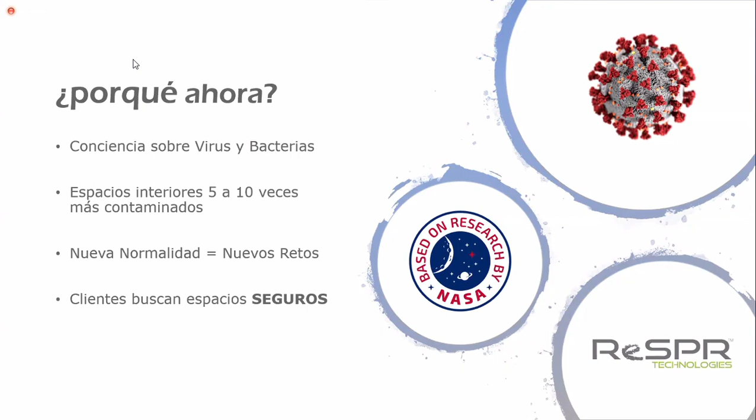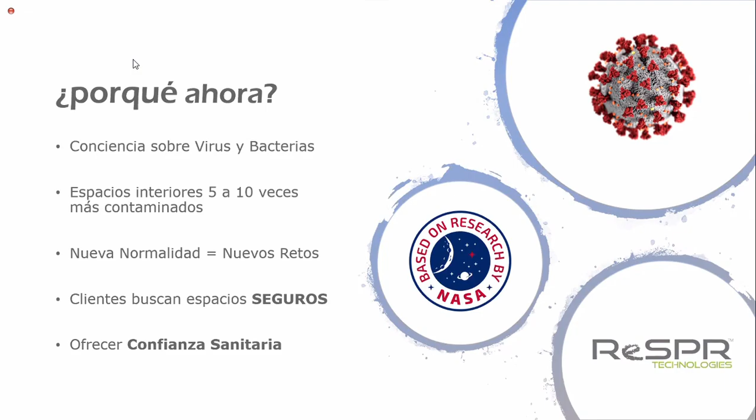So with this new normality, these new challenges, we need to have more safer spaces and provide sanitation certainty, in this case, to the airports and staff that work at the airports. We need to protect the passengers and collaborators at the company. This is also important. They're not free from pollution.

As I was saying, it's a technology from NASA. It's part of the space station. At a point in time, it was used to maintain plants to keep people longer in space without consuming too much oxygen for the astronauts. But we realized there were much greater benefits.

We're talking about active purification, where we will take this solution where the problem is. So far, technologies we're using to clean the air at any airport, any corporate areas are passive technologies. We call them passive because I need to take the problem, the solution to the problem, ultraviolet lights and others, and I try to clean up the air. But we send the solution towards where the problem is.

I will explain how it works. We do it constantly. We work 24/7, different from other technologies that I imagine many airports are using or were using before. In this way, we will eliminate 99.9% of viruses, bacteria, fungi, spores, or any organic matter, so much in the air and surface.

A bit talking about the technology: what do we do? We decompose a bit of the relative humidity in the environment, which is H2O, into peroxide, oxygenated water. Hydrogen peroxide, as we know, is one of the most unstable molecules that exist. If we buy oxygenated water in a pharmacy, it comes in a brown bottle, because if it's hit by sunlight, it becomes water immediately. So what we do is generate this hydrogen peroxide at such low levels that we can barely measure them. We know we generate less than 0.007 parts per million.

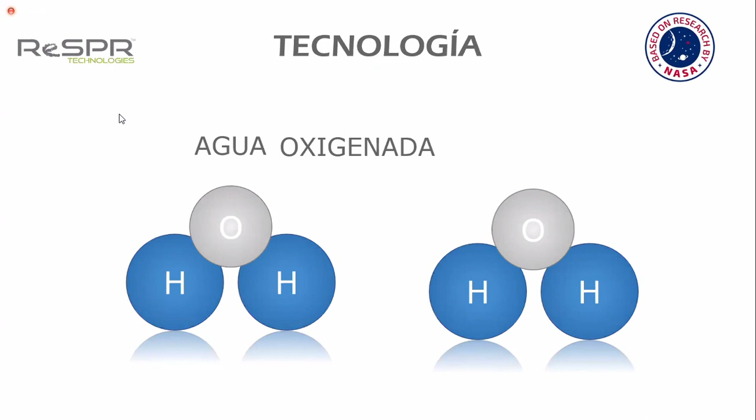We will find in the environment a series of hydrogens. There will be on all microorganisms, viruses, bacteria. With sending this peroxide, what we do is look for these hydrogens to turn this hydrogen peroxide once again into relative humidity. So it's 100% safe. It's the most natural way to decontaminate and the most powerful one we can have.

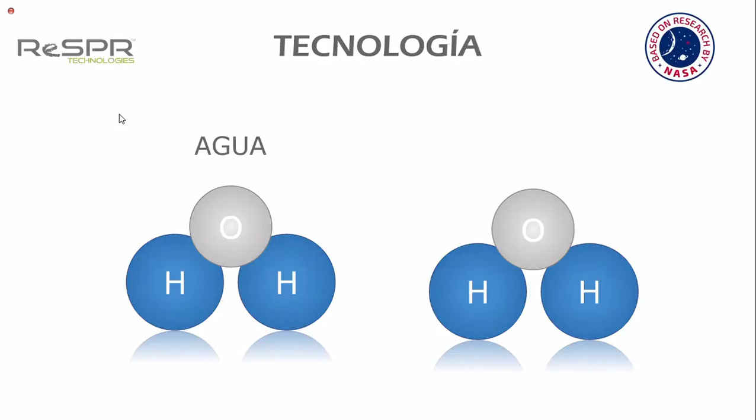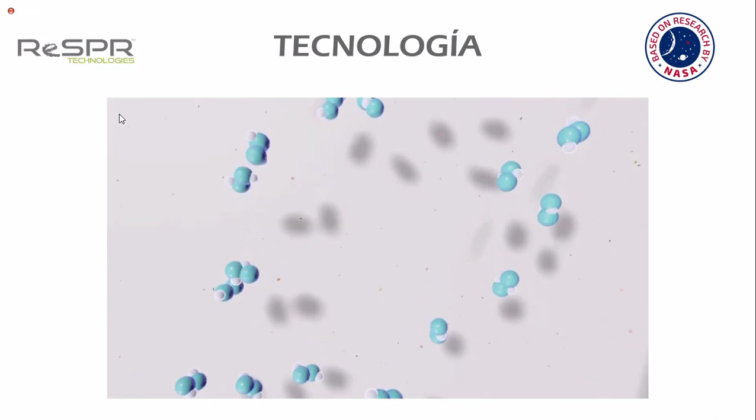When we send these particles - this is a bit exaggerated here so you can see how they stick - to microorganisms with bacteria, we break down these cells to extract this hydrogen, so we deactivate them. In the case of viruses, what we do is destroy their receptors, since they have their protein on the outside part. We deactivate them and they cannot contaminate. In the case of fungi, what we do is dry them out.

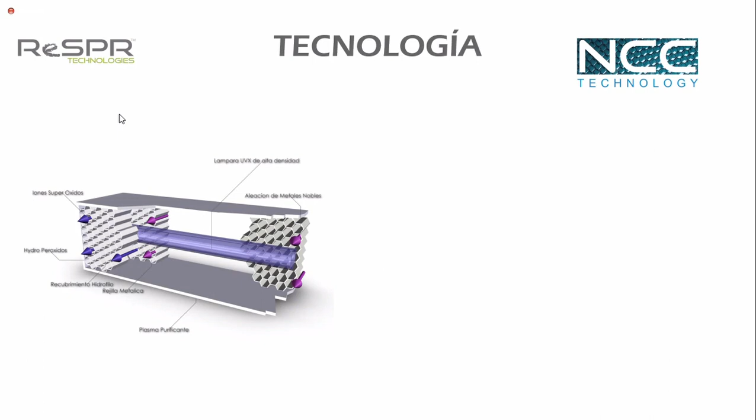How do we do it? Obviously, we use ultraviolet light, not as a purification method, but as a source of energy. Together with carbons and metals, we do this decomposition of the relative humidity into peroxide.

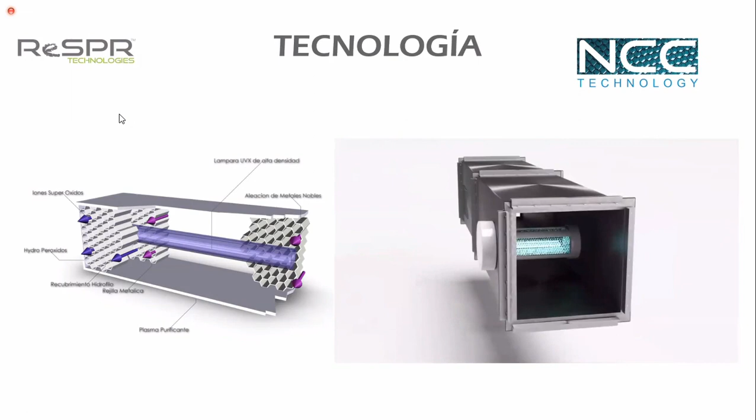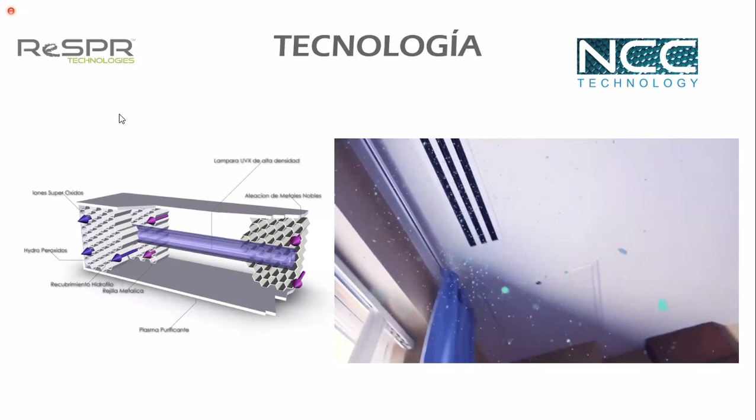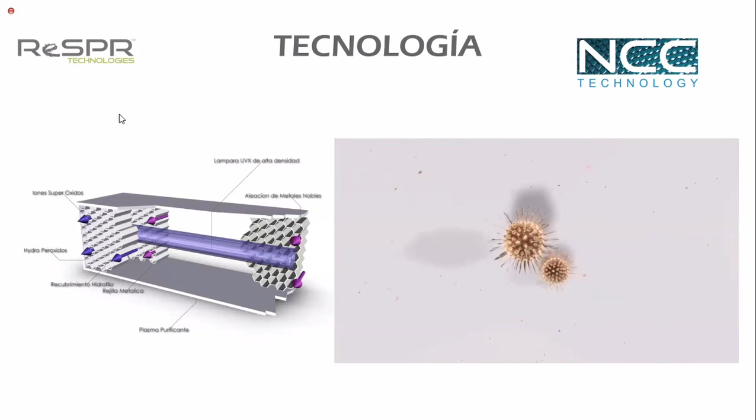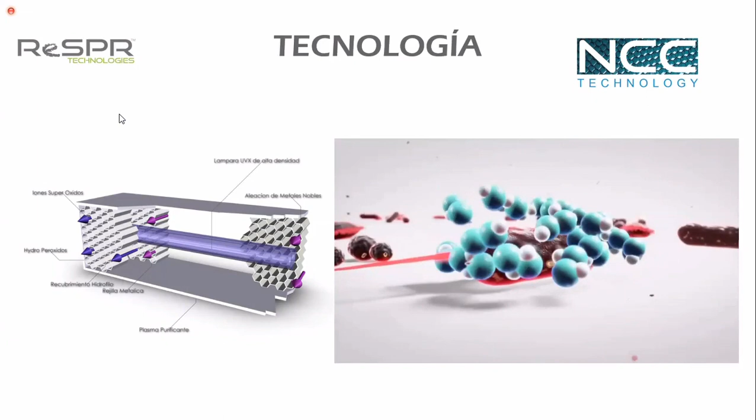There are several ways of doing it. One way is by introducing this in a duct, the same air conditioning ducts where the relative humidity comes in. We decompose it into peroxide and send it out as microparticles in the environment. As you see in these images, this is a hospital. These microparticles will be in all the air, looking for these microorganisms to decompose them and precipitate. We use ionization in our technology for precipitation of particles, and peroxide for decomposition or elimination of microorganisms.

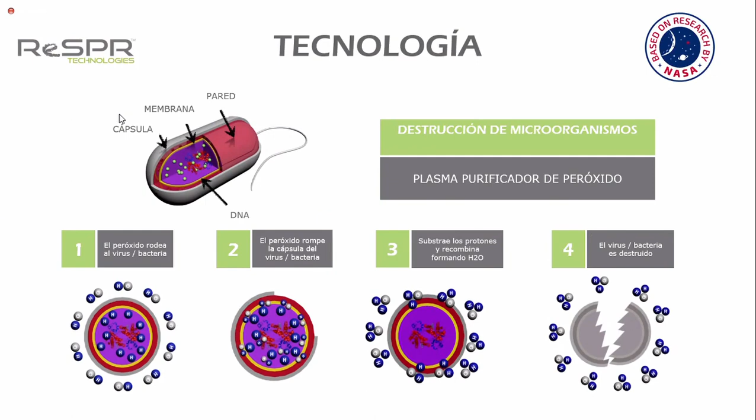This is an example of bacteria, for instance, how we break down this cell wall. We extract these hydrogens, we deactivate this bacteria, and H2O becomes relative humidity once again.

We have thousands of tests, many with Microchem. They support us with the amount of hydrogen peroxide we generate to provide support to the customers. We also have medical tests showing that no person will be harmed.

But what's most important, all our customers that want to do their own tests on site, it's normal. No matter if I send them 300, 400,000 tests - we've done many thousands of tests - we can share our tests with all of you. If you want to do it on your site, on your place, we can do it.

It's very quick. In approximately 2 hours, we eliminate 90% of the contaminants on the surface. And in 12 hours, we reach zero. So we will always keep it at zero, 24/7, in the air and on surfaces.

We have several types of microorganisms. We don't care which type of microorganism it is. We're not a medication. We know COVID is around the world now - just about no one is COVID-free in the world. So we know it's a behavior. We cannot ensure it, but we've done it with all types of viruses, N1, H1 - we know we eliminate them. We're not a medication. We kill microorganisms based on our reaction, a natural reaction based process.

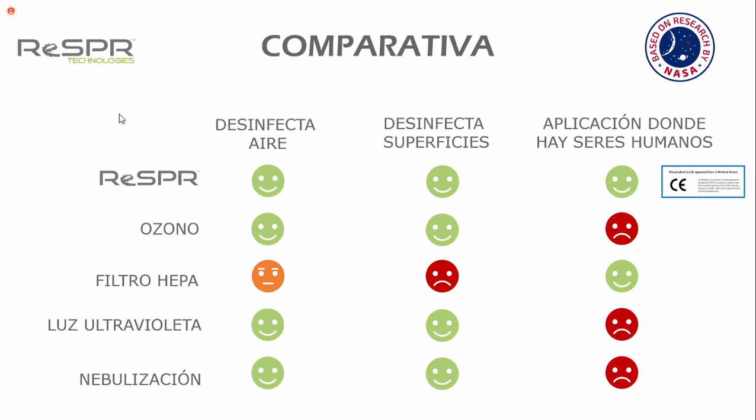The same with nebulization. It could be with chemicals or peroxide, but the levels of peroxide that are used are greater than those allowed by WHO. So we can't go inside the airplanes and have people like in Ghostbusters fumigating and doing all of this, but you can't do it with people inside the plane.

Now we go to the different types of equipment we have. So we can go to your questions. I imagine you have several.

We have equipment that goes directly and works with the ducts. We make a small hole. The head we see here is outside, and only the cartridge and catalyzers are inside the duct. We're not a filter. We don't affect, there's no drop in pressure in the duct. It's the same pressure. We will take advantage to send this peroxide to the different areas.

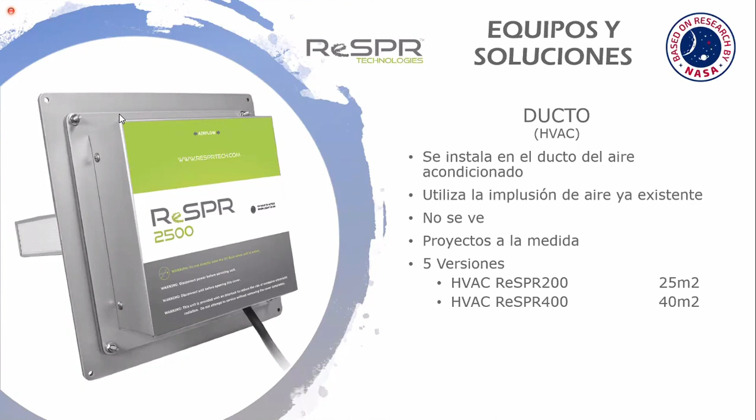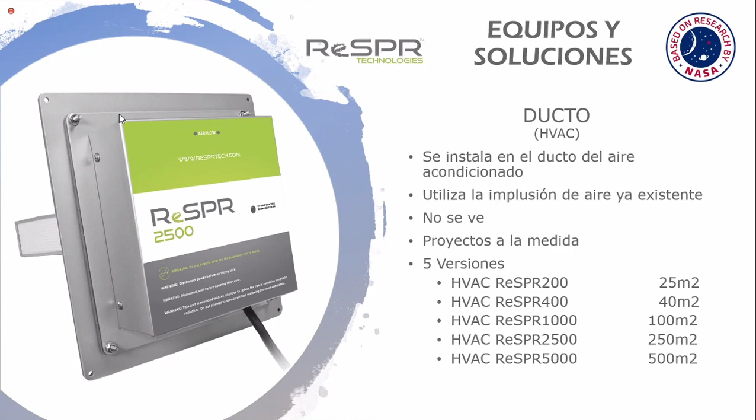Portable equipment. For me, this is the best one we're using, not necessarily the best one in the case of airports, but it has different applications. We can install it at airports, in an office, at a home, anywhere, in a restaurant. And we call it plug and play because you just plug it in, and there you see it says 3,000 square feet. Depending on the area, we will purify. We will apply it here, and then we can purify those areas.

We have 2 models. We have the 50 model for 50 square meters, and the 3,000 for 200 square meters. But depending on the load of people, we offer up to 278, 300 square meters.

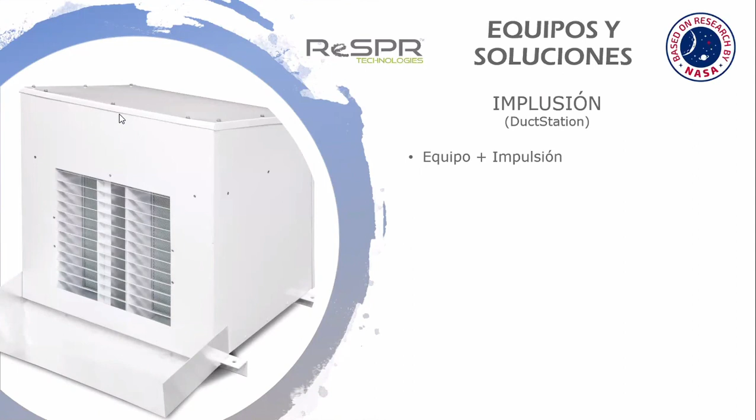In the same way, I installed this in the Mexico City airport once. This is impulsion equipment. The only thing we do, the same equipment we have for the ducts, we build a box to simulate a duct. And in this manner, it can work 24 hours a day, and we don't have to use the airport's ventilation.

So we have for 25, 40, 100, 500, up to 1,000 square meters. Depending on the areas, there must be open areas. The only thing that limits us, the technology, is the separation, the doors. If I have an office with 10 cubicles or an office of the same size open, if it's open, certainly I will have one single equipment for 250 square meters. But if I have 10 cubicles, I will need one equipment per cubicle, be it in the duct or with its own impulsion. So these are topics to consider.

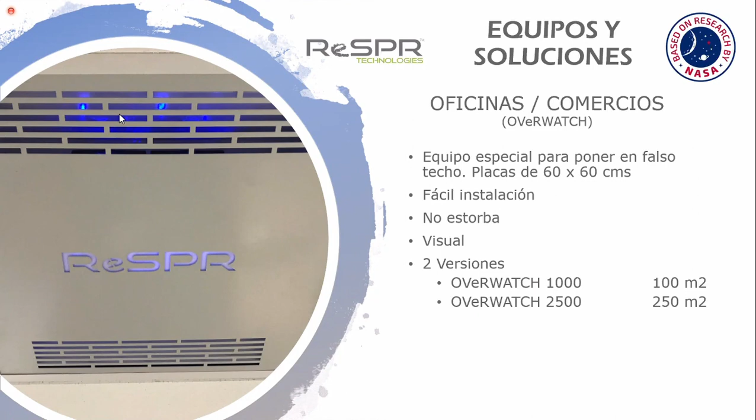Well, we go into the conclusions. Now we have an important part, which is your questions. What is it we need to do? I think all the efforts you are doing... I just came from Spain 3 weeks ago.

There are many deficiencies. You go to the airport, well, we wash our hands, there is nebulization, people in front of me with a face mask - we know it doesn't eliminate 100% of organisms. There's this problem, this pollution. If somebody touches a surface, it's not that somebody will automatically be behind me cleaning this up. But if we do it through the air, which is the best way of reaching every corner, if somebody touches a surface, it's certain that in 20, 30 seconds it will be disinfected because our air will disinfect it. So these are some of the things we need to keep in mind.

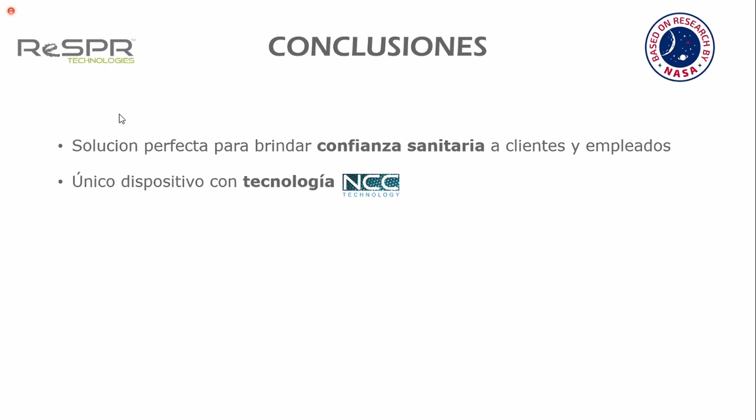We have NCC technology, catalytic converter 24/7. We don't need staff, this is the best part. There are always many programs out there in the States on disinfection carried out at hotels, and there's always a place that was not cleaned up 100%. Unfortunately, human beings cannot see these viruses. It's almost impossible to reach every corner, but through the air, we can do it.

So this is it, to be with the new sanitation standards. This is all, thank you very much.

Can you hear me okay? Yes, thank you Manuel, in fact we have several questions. I will read the first one from Diego Sanz, Argentina 2000 Airport. He's asking about the duration of the generators, whether they must be replaced, or how often the cartridges have to be replaced.

We have different types of maintenance, corrective and preventive. Corrective is not necessary if we use our own impulsion equipment. If they're in the ducts, they might need some type of maintenance if the duct is not clean enough. But our technology itself has maintenance every 18 months, with a cost of 20% of the equipment.